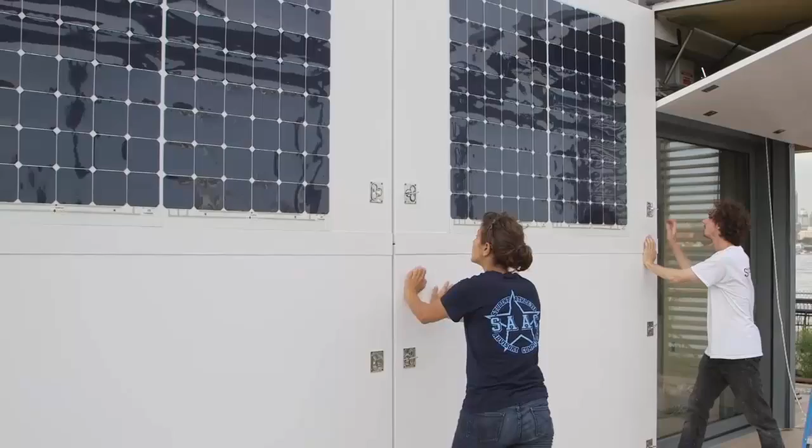But at the same time, sustainability is not always about the environment. It also relates to business. They will take a sustainable business strategies course and a project management course. Most of these courses are taught by industry people, those doing sustainability on a daily basis as part of their job.

Any organization that has a large number of employees and a physical infrastructure will have to have a sustainability office. If you have the passion to develop and maintain a sustainable world, come to us and we will help you shape your passion into a career which will create an impact.

So thank you again. Just by way of background, I have a degree in civil engineering with a minor in engineering management. But again, to age myself, the degree I have is civil engineering, but it's actually what you would call environmental engineering today. It was before they actually had something called environmental engineering.

Then when I went to law school, I think this was way before sustainability as a term was in vogue. When I went to law school, it was actually, I think, the first book I read since high school, because in my four years of engineering school, we didn't do a whole lot of reading back then. So it was a great way to think out of the other side of my brain for a while.

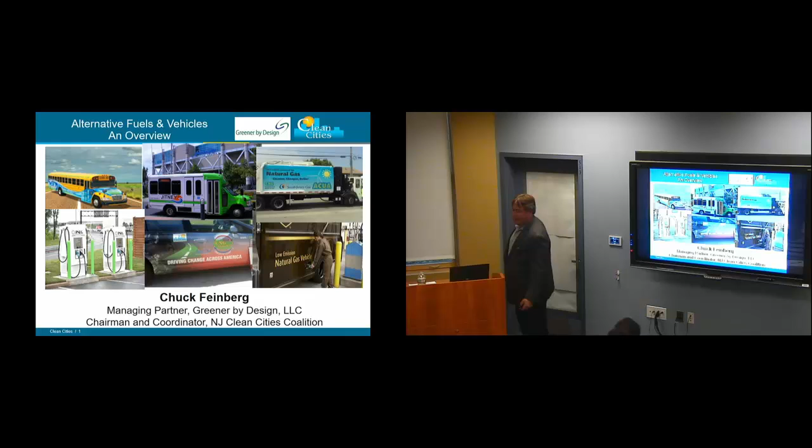But anyway, so I run an organization called the New Jersey Clean Cities Coalition. We're an independent nonprofit, and we have to go through a formal process to be designated as a Clean Cities Coalition by the U.S. Department of Energy.

So we're the only entity in the state that is exclusively focused on public-private partnerships to reduce petroleum in the transportation sector. And we'll talk about how we do that.

So it's all about building relationships and strengthening markets. We connect fleets to fuel providers. We connect technology vendors with service providers, infrastructure providers. We offer training and information doing things like this, specialized technical assistance.

When there are funding opportunities available through the Department of Energy or EPA or anyone else, that makes me a very popular person, because everybody thinks that I have some control over how those funds are doled out, and sometimes I have some influence, but I wouldn't say control.

We provide public recognition to fleets that are reducing their petroleum footprint and using alternative fuels. And we collect data and track progress as a government-funded organization—that comes with the territory.

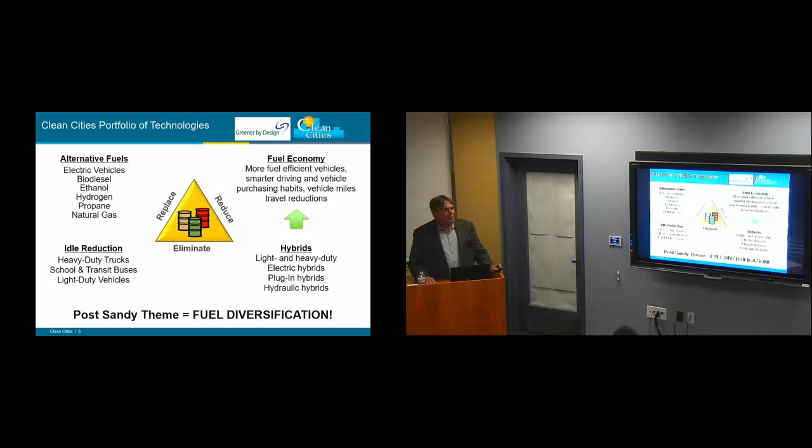If you think about it, there are lots of different ways we generate electricity—solar, petroleum, coal, wind, you name it. But when you look at transportation fuels, we're more than 90% reliant on petroleum. During and after Sandy, we saw issues with the fuel supply, and we've seen them recently with Harvey, Irma, and Maria. I'll talk more about that.

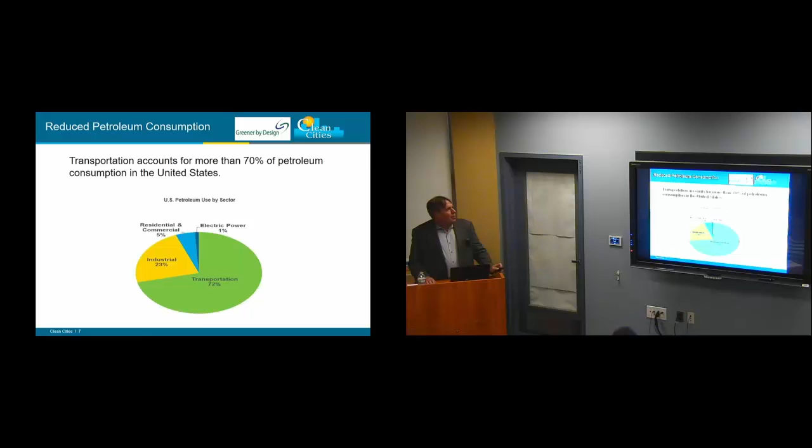Petroleum consumption: more than 70% of petroleum consumption in the United States is transportation related—big number. Greenhouse gases: about 27% of all greenhouse gas emissions in the United States relate to transportation. Imported petroleum is not as big an issue as it was when I first got involved back in 2009, 2010—those numbers have been steadily going down, but we did see a slight increase this past year. Still, about 25% is imported.

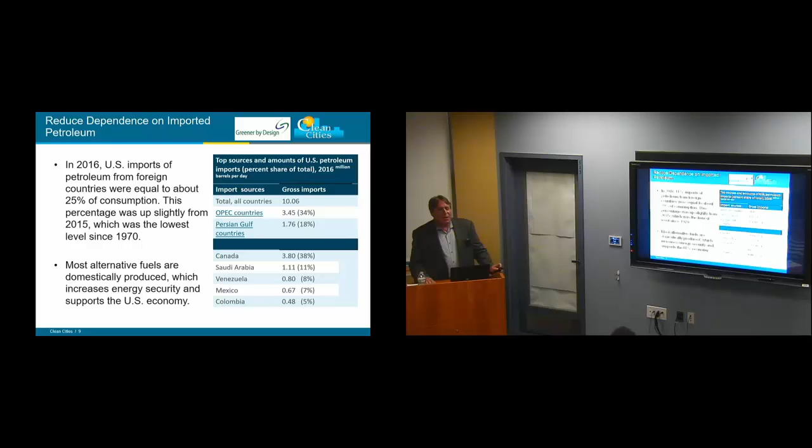The biggest importer is Canada, but there's also lots of imports from places that don't necessarily like the United States, subjecting us to fuel supply disruptions that would be big issues for us. It blows my mind that the United States actually exports petroleum, natural gas, LNG, but at the same time we're importing—there's obviously a very complicated story behind that, but something to think about.

Again, it's not just about alternative fuels, it's also about idle reduction, and that's really the low-hanging fruit of fuel economy. That's a mouthful.

Idle reduction activities include driver habits of not running their car unnecessarily, because there's the old way of thinking that it's more efficient for the engine to leave it on rather than turn it off and back on again. That is outdated—that is not the case anymore. Do not let anybody tell you that it is. Idle reduction is also very important for heavy duty fleets.

We work on installing truck stop electrification, which is a lot more than it used to be. In the old days, it was basically just plugging in the truck. But now, many truckers that overnight or whatever, when they have to take their breaks, in order for the climate control systems in the cab to continue running, they have to keep the engine on. In order for any refrigeration in the truck to continue operating, they have to keep the engine on. There's lots of new technologies out there now to separate those systems so that they don't have to keep the engine on, and they can run off of electricity or whatever.

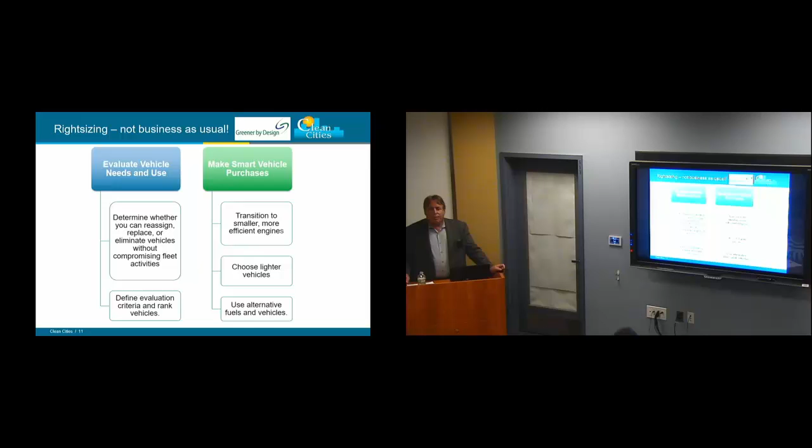We need to determine whether you can reassign, replace, or eliminate vehicles without compromising performance, and look at those vehicles and have a replacement schedule, have a maintenance schedule. Look to transition to smaller and lighter vehicles where possible, and in most cases it almost always is possible. And then look at alternative fuels, such as what we'll talk about.

But here's a couple of my favorite quotes that I've come across over the years in this. If I had asked people what they wanted, they would have said faster horses. That's a famous Henry Ford quote that comes up a lot now with electric vehicles when people ask, why is it taking so long for electric vehicles? Well, change takes time.

We can't solve problems by using the same kind of thinking we used when we created them. That's another one of my favorites. And this one's my absolute favorite: the Stone Age did not end because we ran out of stones, and the oil age will end long before we run out of oil. So just keep all of those in mind, and these are pretty much why I do what I'm doing.

So speaking of what I'm doing, here's a couple of the projects that I've been working on over the last couple of years. Whenever you're talking about alternative fuels and alternative fuel vehicles, it's always the chicken and egg situation. What comes first, the vehicle or the fueling infrastructure? I've heard the chicken and egg situation described recently as really more like a hot dog and a bun. You can't have one without the other. You need to have them both at the same time.

So a couple of these projects, I'll talk a little bit about the CNG fleet and infrastructure program, but just to highlight the EV policy support, this is a contract where I was hired by the New Jersey Department of Environmental Protection to help them, help bring electric vehicles to their attention. This is way back in 2011 when I put this report together. And one of the people from the state just the other day was referring to this report, and he said it's good news and it's bad news.

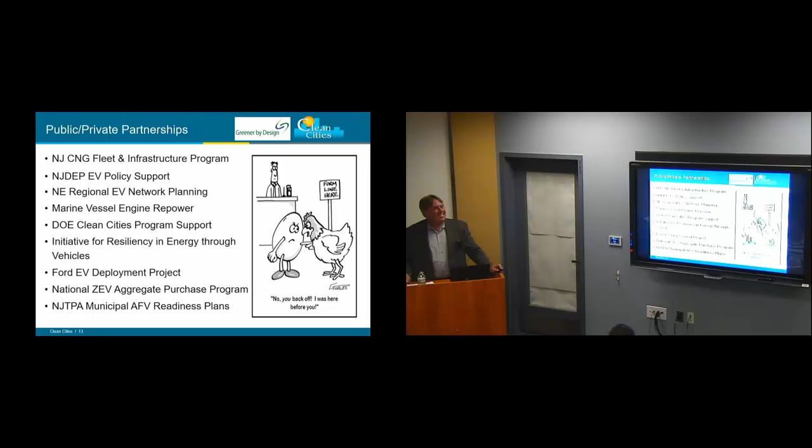If you remember, there was a major fuel disruption. Fully 11 days after the storm, more than 20% of the stations across the state of New Jersey did not have fuel. That was for two reasons. One, because of the power outages, they couldn't get the fuel out of the ground, out of the tanks. That was for some of them. And some of them totally ran out. The ones that did have power ran out of fuel and couldn't get more. We actually had gasoline rationing for more than a few days.

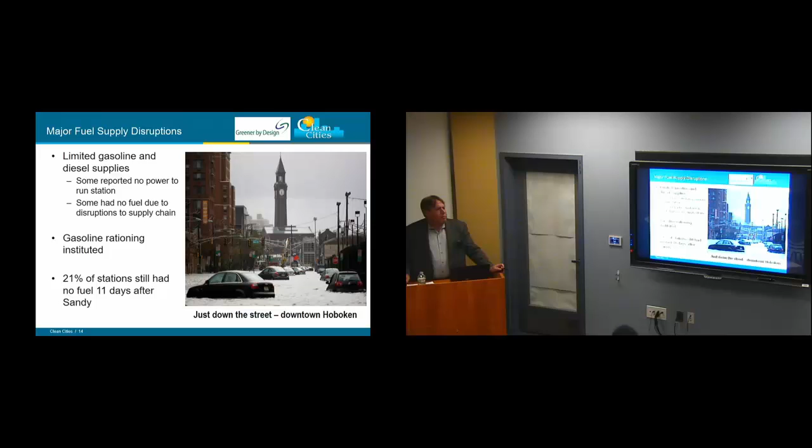So, among other things, that showed us the importance of fuel diversification. There are several examples of fleets that used alternative fuels, propane, compressed natural gas, even electric, that were able to continue operating during the emergency. And I pointed up the need for not so much first responders, but emergency planners to become more cognizant of the resources available to them. What fleets out there use alternative fuels? How can they be used in an emergency if needed? Maybe the first responder fleets themselves should incorporate alternative fuel vehicles.

Things like, there was an example of a propane-powered fleet up in Sparta, New Jersey, in Sussex County. You wouldn't think that Sussex County was affected by the hurricane, but they had lots of trees down, and because of that, they had power disruptions. So the local propane company, which runs their entire fleet on propane, was able to continue operating, and they were delivering propane to people's generators so they could continue operating. But because the emergency responders couldn't get out, it was the propane fleet drivers who got out of their trucks and removed the tree limbs with their chainsaws. So they were the ones responding to it.

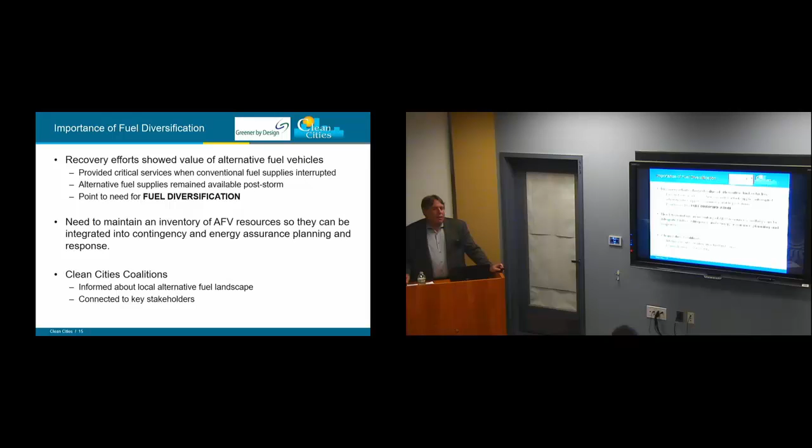It's also the Atlantic City Jitney Association, which I showed you one of the vehicles before. They took care of all the evacuations from the island of Atlantic City, where other traditionally fueled vehicles were not able to operate.

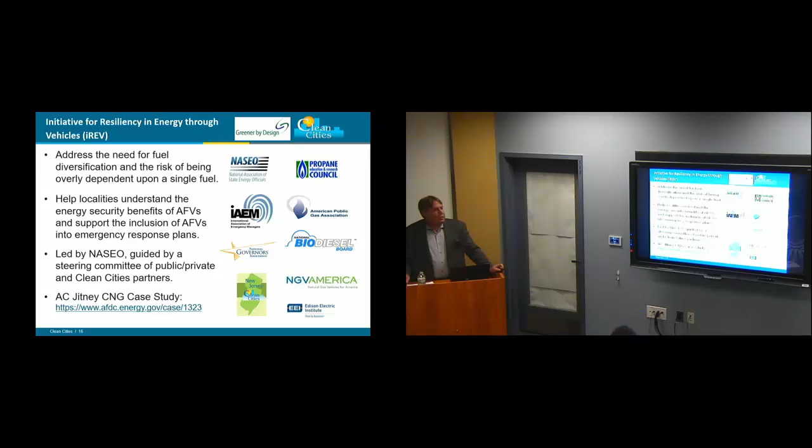And that led to a Department of Energy funded grant program that I'm working on that addresses the need for fuel diversification, working with localities and emergency responders and planners to help them become more aware of the resources already out there and what they should be looking at in the future. Another example is out in Long Island. There was a dump truck fleet that ran on compressed natural gas, and they were able to clear the roads on Long Island of all the sand, only because they operated on CNG.

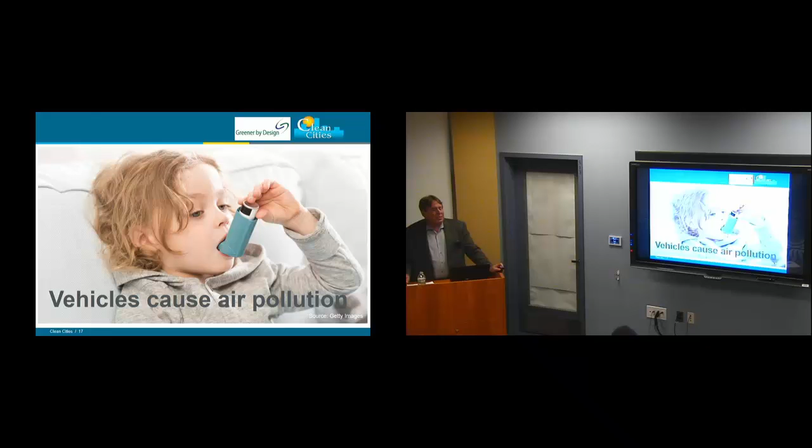So, bottom line is vehicles cause pollution. There's no two ways about it. About 50% of Americans live in areas where the air is unhealthy to breathe. Pretty scary number.

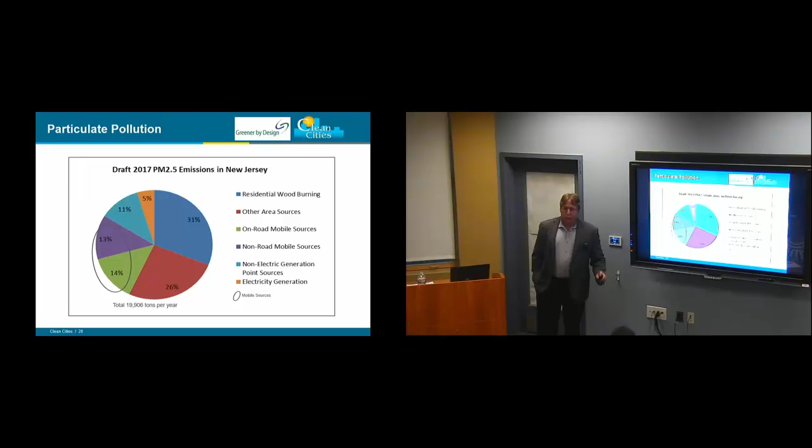Ozone, another big pollutant from vehicles. Ozone's a complicated concept. There's actually good ozone and bad ozone. The good ozone is up in the protective layer of the atmosphere in the stratosphere. That is being degraded by other factors, not necessarily related to transportation. You've probably heard about ozone holes in the atmosphere - that's good ozone, we like that ozone. Bad ozone is commonly known as smog, caused by the emissions of nitrogen oxides that come from vehicles. That's ground level ozone. About 70% of NOx emissions in New Jersey are from transportation.

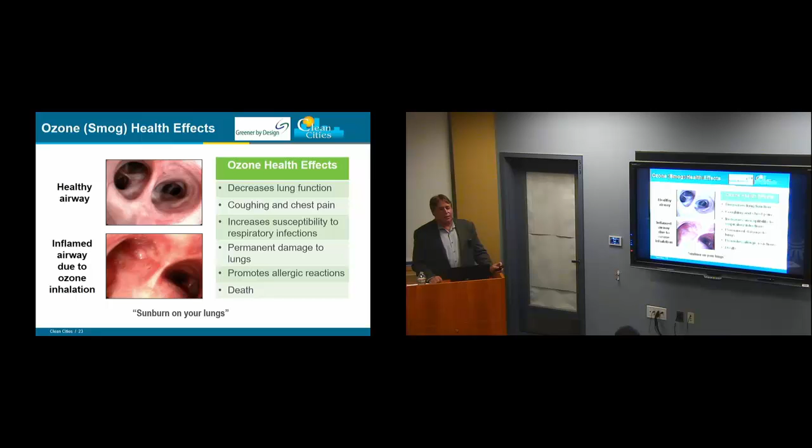So the ground level ozone is formed when the nitrogen oxides react with other volatile organics and they form smog. This is what happens with too much ozone in the air - sorry to be graphic, but the top picture there is a healthy airway, those are your lungs, you can see it's a clear path. The lower picture is a lung that's been inflamed due to ozone pollution. I've heard friends of mine at the DEP refer to ozone pollution as sunburn on your lungs. Not a pretty picture.

And greenhouse gas emissions - I mentioned this earlier, 46% of New Jersey's greenhouse gas emissions are related to transportation.

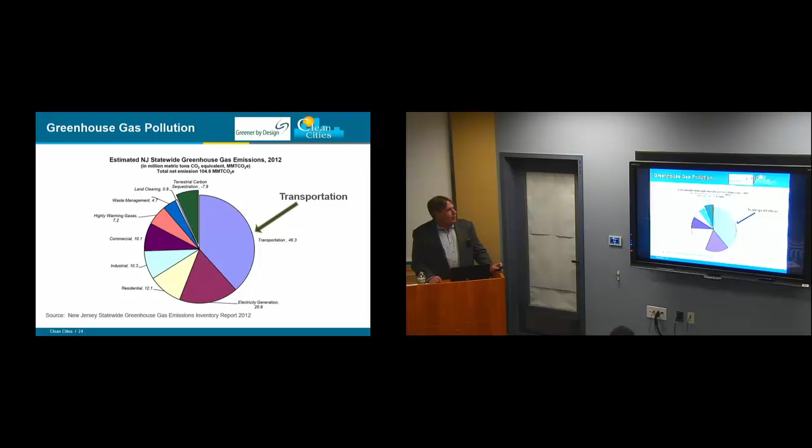But so think about it. Isn't there regulations that govern this? Why is this still such an issue?

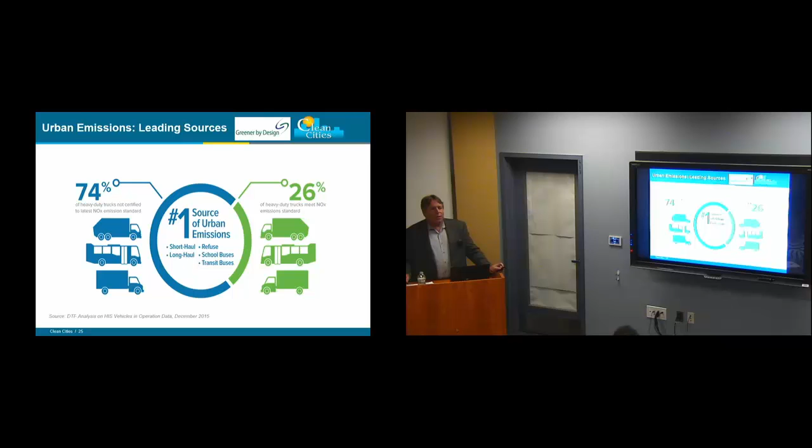Well, the number one source of urban emissions is transportation - heavy duty, short haul, long haul, school buses, refuse trucks, delivery trucks, all of the above. And 74% of those trucks on the road now do not meet emission standards because they don't have to. The emission standards only apply to new vehicles, so it takes a very long time to get those old vehicles off the road under current scenarios.

Which brings me to want to talk about alternative fuels. As I said with the fleet scenario, it's no longer one size fits all. Some of these fuels work differently in different situations. Right now, electric vehicles are primarily for the light-duty consumer passenger vehicle market. Biodiesel, propane, natural gas - those are better suited for medium and heavy-duty vehicles. Those lines are changing as electric technologies continue to advance.

That's going to change over time. I've been hearing stories of electric trash trucks being deployed in a couple towns in California. Tesla's working on an electric heavy-duty vehicle. Some of the other manufacturers are also, but it's going to be many years before they are commercially available at a reasonable price.

Are the buses in New York hybrids or electric? Many buses in New York are hybrid. They don't have any fully electric buses yet, and they also have a lot of CNG buses in New York. New Jersey Transit has, I think, 150 or so compressed natural gas buses, the full-size transit buses.

And they just did receive a federal grant to help them offset the cost of their first electric bus. So New Jersey is getting one electric bus. Right now it's probably 3 times more expensive than a regular bus, and since New Jersey Transit is broke, I hate to say it, but it doesn't make sense for them to spend that extra money. But eventually we'll get there.

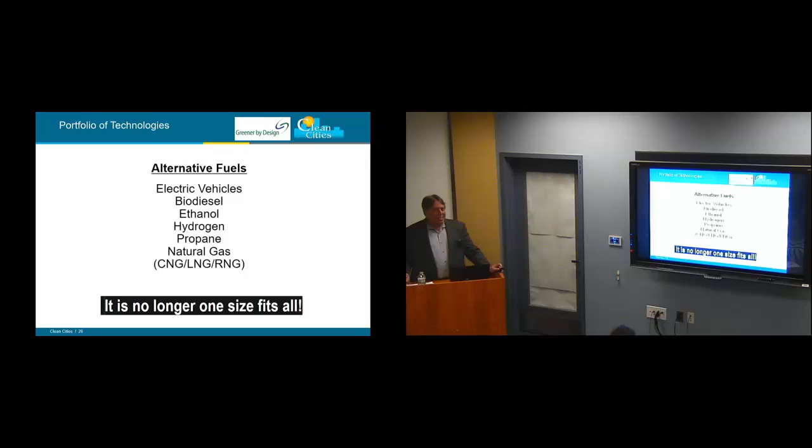So let me talk about natural gas. First of all, natural gas is a fossil fuel, and it's readily available now thanks to fracking. So there are some issues with natural gas, but I always bring it back to compared to what. Sure, we want a perfect clean fuel that's clean well-to-wheels, but compared to imported diesel fuel, natural gas is much cleaner.

And it's also the cleanest burning fuel available for heavy-duty vehicles. Look at the chemical formulas on the second line there - natural gas is CH4, so 1 carbon, compared to diesel, which is 14 carbon molecules. So it's an inherently cleaner burning fuel. And replacing one diesel garbage truck with a natural gas garbage truck gives the same emission benefits as taking 325 cars off the road. Pretty significant.

And even more for noise reduction, and garbage trucks are obviously operating in communities and neighborhoods. Noise reduction is significant - a natural gas garbage truck is 90% quieter than a diesel counterpart. And when we first started deploying these, people actually complained because people will complain about anything given the opportunity, but they complained that they didn't hear the truck coming from 2 blocks away, and they didn't get their cans out in time.

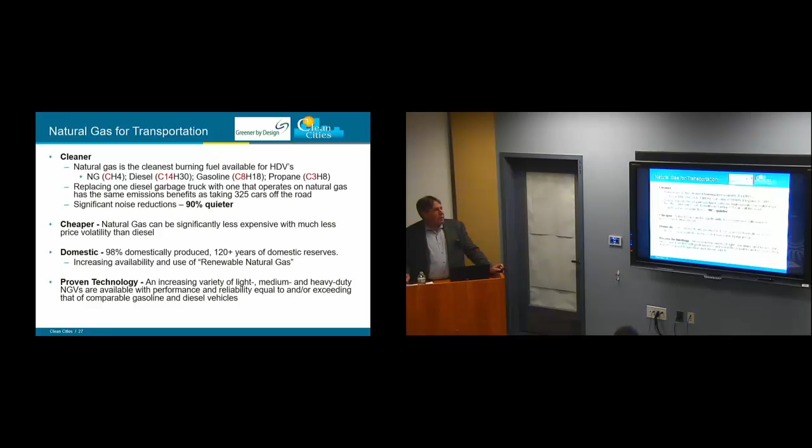And now, I'll talk more about this, but increasingly available is renewable natural gas. This is gas that's produced from anaerobic digestion, from sewage treatment plants, or food waste recovery, or anything along those lines. It's biogas that's cleaned up to be chemically equivalent to natural gas.

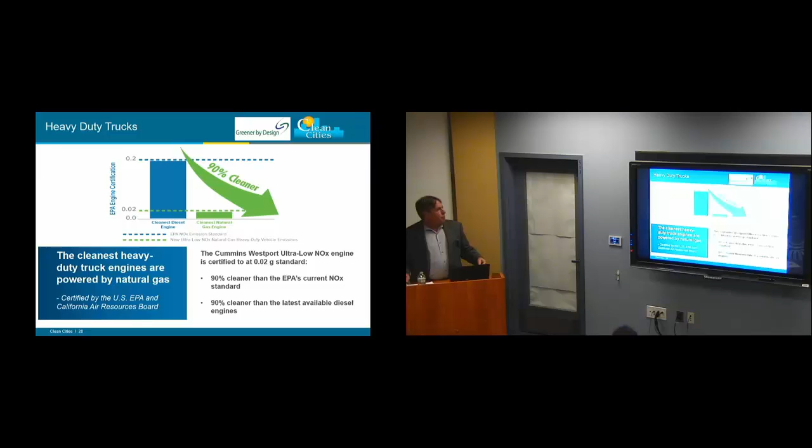And just to emphasize the point, the top line there, the 0.2, that's the current EPA standard for heavy-duty trucks. I actually don't remember what 0.2 what, but I think it's NOx emissions. A compressed natural gas engine, which has recently been certified by California and EPA as the cleanest heavy-duty truck available, is 90% cleaner than the EPA standard. The cleanest diesel engine meets that EPA standard, but the natural gas engine is 0.02 versus 0.2. So pretty significant emissions benefits, and this is on a well-to-wheels basis - this includes production of the natural gas versus production of the diesel.

So again, fueling with natural gas reduces CO2 greenhouse gas emissions. With liquefied natural gas, it's an 11% reduction. With compressed natural gas, it's a 17% reduction. Pretty significant numbers, on a well-to-wheels basis.

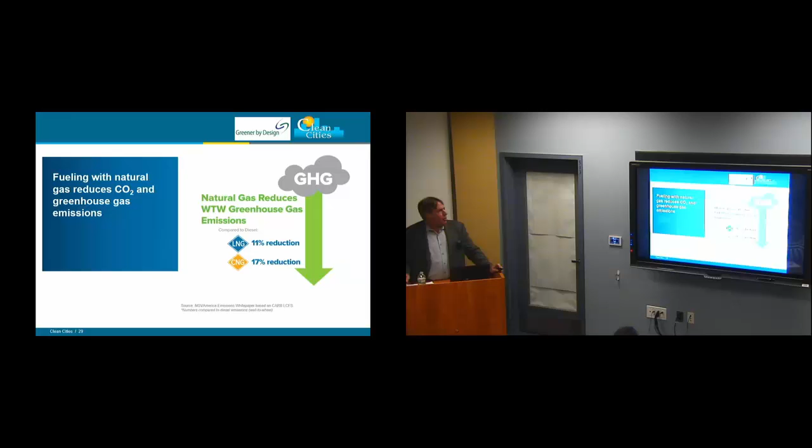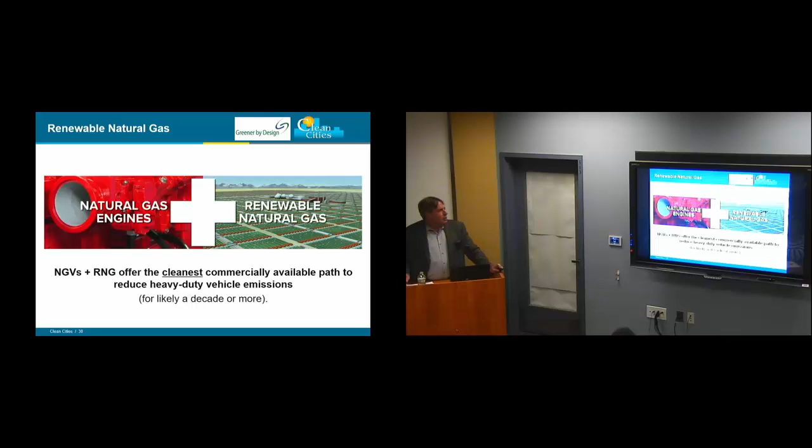And when you combine the latest natural gas engines with renewable natural gas, it's significantly cleaner. And as I mentioned, it likely will remain so for the next decade or so, until new technologies come along and become commercially available.

But if you look at the carbon intensity rating, conventional diesel fuel is 102, but using renewable natural gas generated from food waste, it's actually negative carbon intensity. So on a life cycle basis, it's extremely beneficial from a carbon intensity standpoint.

And something for those of you looking for jobs coming up soon - I'm involved in a big development project that hasn't been announced yet. It's a food waste collection facility that's going to be developing anaerobic digestion and generating biogas. It's going to be based in Newark, and it's the first of what we hope will be many of these across the world. From that process, we will be collecting the food waste, putting it through the digestion process, and that generates the renewable natural gas, and it also generates organic fertilizer. So a pretty cool project.

Quick question: how scalable is it? Basically at the aggregate level, what's the energy content of all waste? And also, given that we are trying to minimize waste, is it just a lab thing?

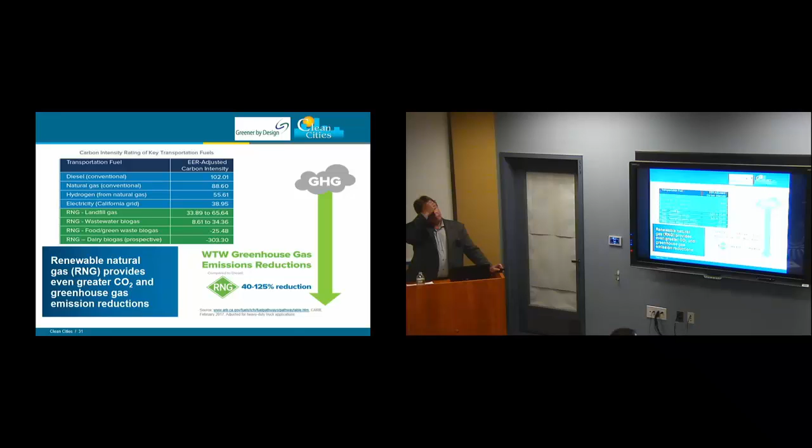Yeah, if I can add to it - many organizations have started this on a much smaller scale. Even Stevens has its own anaerobic digester. Again, the idea is to connect it to the cogen plant. So what they are doing, on a much larger scale, is taking stuff directly from the local community. Hopefully that would be a very successful venture.

Sure, I'm just trying to see the maximum share in the portfolio of all solutions. A whole-city approach, to my knowledge, hasn't been done yet. But it's scaled up from an individual farm or a lab on a campus, taking your dining hall waste, to whatever.

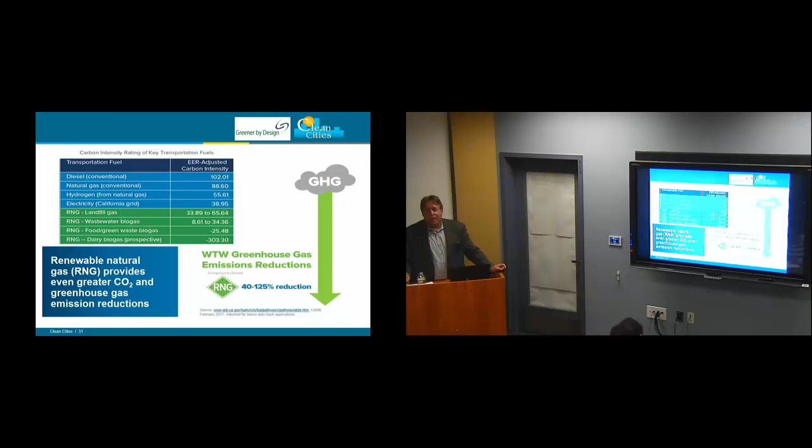So just an example of putting all of this to use - this was a project we had. This was actually a $15 million grant that we were awarded from the Department of Energy. And we used that to leverage about $36 million of non-federal money, and again, that money probably would not have been spent in New Jersey otherwise.

But we worked with 15 fleets, public and private, across the state, and transitioned them. We got rid of their diesel trucks and got CNG trucks for them. We put in 6 fueling stations across the state. And just this project alone displaces more than 2 million gallons of petroleum a year and 900,000 pounds of criteria pollutants.

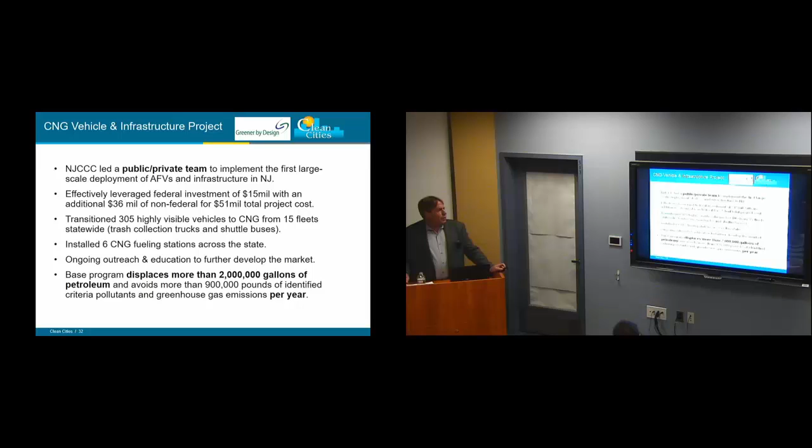So a very successful project, and every one of the fleets that was involved in this project, with the help of the federal money, has since increased the number of CNG vehicles that they have, which is a great sign. And other fleets in the area of those stations we put in are also converting their fleets.

So let's move on to electric vehicles. I talked about CNG in the context of heavy-duty trucks. Electric vehicles are something totally different right now.

This is an actual picture of Thomas Edison's home charging station from 1911-ish that is at the Edison Museum in West Orange. This thing looks like something out of a Frankenstein movie with dials and gadgets and all that. I was afraid to touch it. I don't know if it works or not. Wasn't about to go near it.

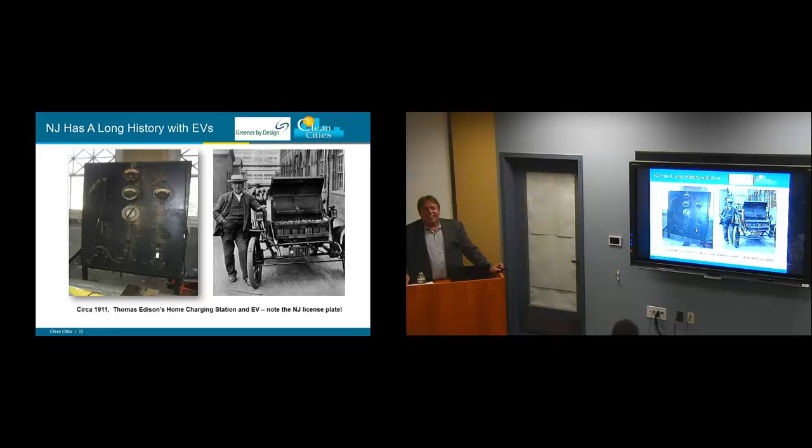And that's Thomas Edison's car, electric vehicle. I'm sure you can't see it, but the license plate is New Jersey registered. I don't know if this was the exact vehicle or not, but Henry Ford actually gave Mrs. Edison an electric vehicle because he felt gasoline, or the kerosene they were using at the time, was too dirty a fuel for women. So he gave her an electric vehicle.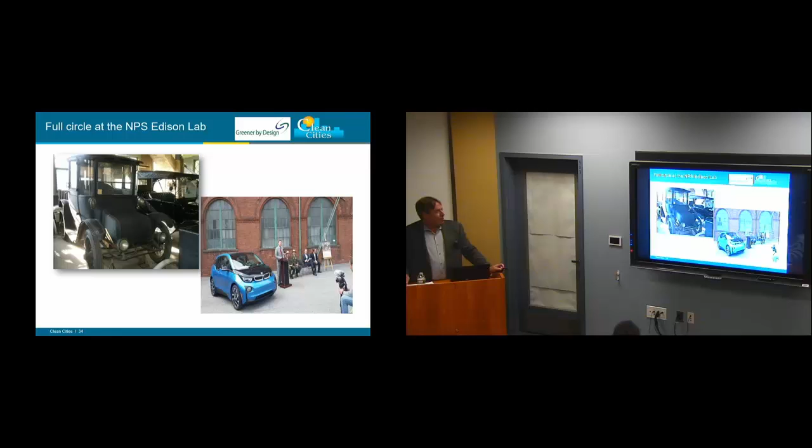This is the Edison Lab, National Park Service Edison Lab. A couple of weeks ago, we had an event there at the same site where there's pictures of this electric vehicle from the early 1900s. We had a BMW i3 there, and BMW just donated a couple charging stations to the National Park Service to have at their parks and historical sites. Pretty cool ceremony.

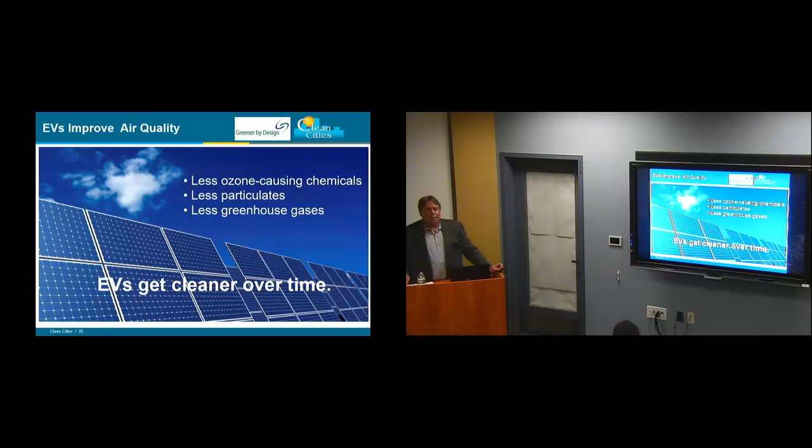So the thing with electric vehicles is they will continue to get cleaner over time. As the grid itself cleans up, electric vehicles will get cleaner. Here in New Jersey, we have one of the cleanest mixes of generation assets in the country. So whenever I talk about electric vehicles, I always get, aren't you just replacing the emissions from the tailpipe with smokestack emissions from generating facilities? Well, not in New Jersey. And in fact, not anywhere in the country these days.

For a while, some of the Midwest states that relied on coal, it was close whether electric vehicles were actually cleaner or not. But now that coal is being phased out and hopefully will remain phased out, our electric generation is very clean.

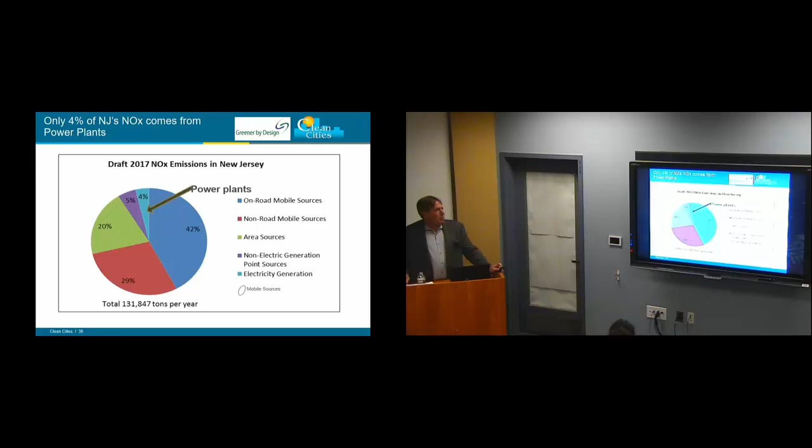So when you talk about electric vehicles, there's basically four technologies out there. Just start throwing stuff at me if this is basic information or if you guys already know this. So there's plug-in hybrids, there's fully battery electric, 100% battery electric vehicles, and there's battery electric with range extenders. Some of those work in different ways. Some generate electricity to recharge the battery while it's in motion, and those are gasoline. Or some are true hybrids that run on electric or run on gasoline.

And then there's hydrogen fuel cells, which is an up-and-coming technology. I'll talk a little bit more about that. All of the major automakers are coming out with, or are out with, hydrogen fuel cell vehicles right now.

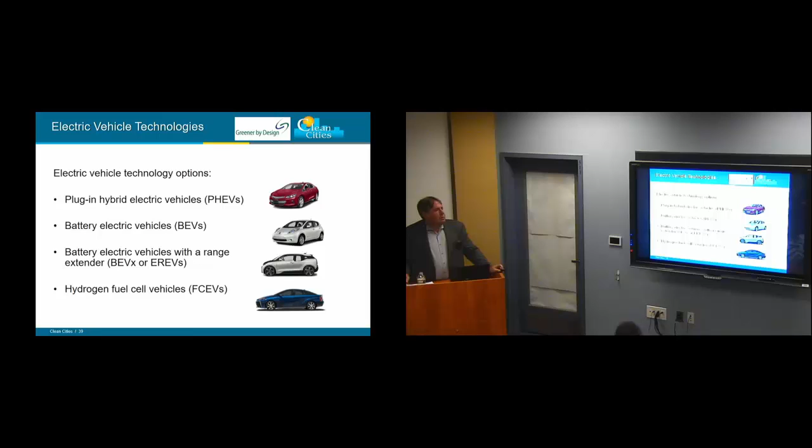So benefits of electric vehicles: fuel cost savings, obviously. Savings on maintenance. There's so many fewer moving parts on an electric vehicle that the maintenance is extremely simple. I mentioned tailpipe emissions from electric vehicles. Well, guess what? There's no tailpipe on electric vehicles, so obviously there's no emissions.

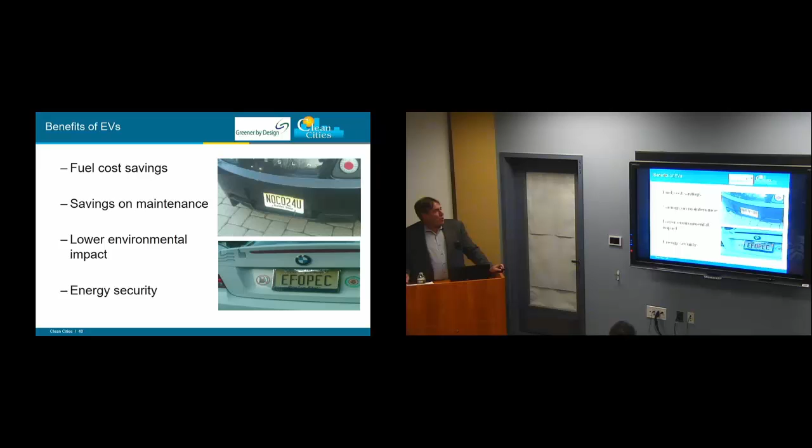Lower environmental impact and energy security. This is a pretty basic slide, but what I like is the pictures of these actual license plates in New Jersey. One says No CO2 for you, and one says F OPEC, which is one of my favorites.

So why has it taken so long? It's all about the batteries. The power density, the cost, the weight, the battery life—you can see on that graph, on both of those graphs, the costs have gone down tremendously over the past couple of years. The leaps in technology have been fascinating to watch, and they're still going on. And the battery weight, the weight of the vehicle obviously has a lot to do with the range and with the impact of the vehicle.

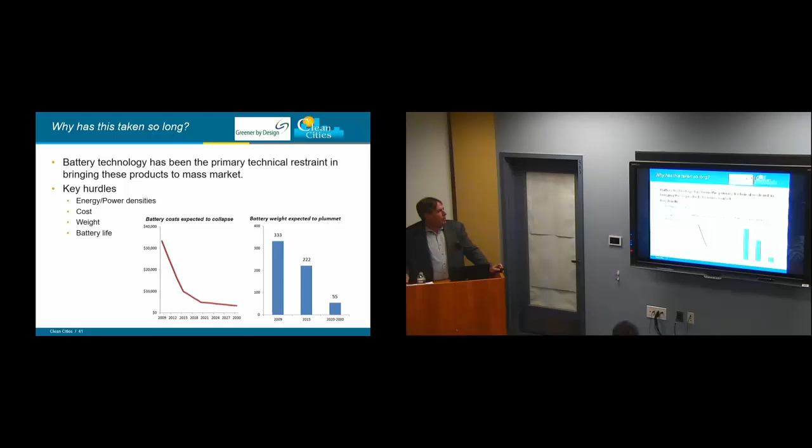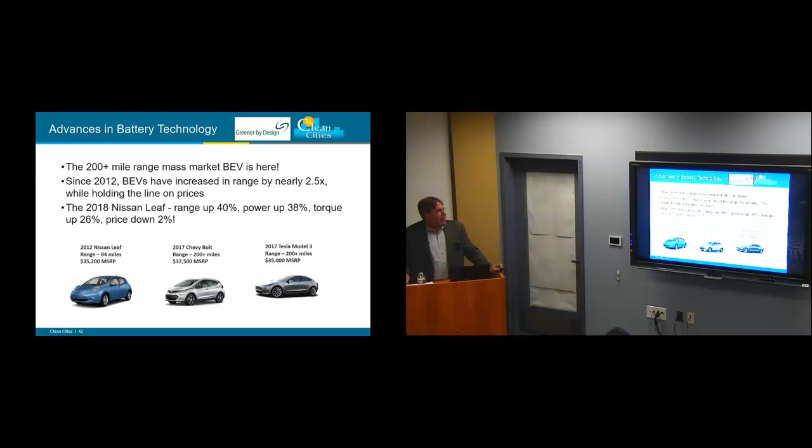So 200-mile-plus electric vehicles are on the road now. That is the new standard. Not to say that all electric vehicles out there can hit that, but that's the new standard. And since 2012, the range of electric vehicles has increased by 2.5 times, and they're selling for about the same price. In fact, the new Leaf has a 40% increase in range, and it costs less than the previous model.

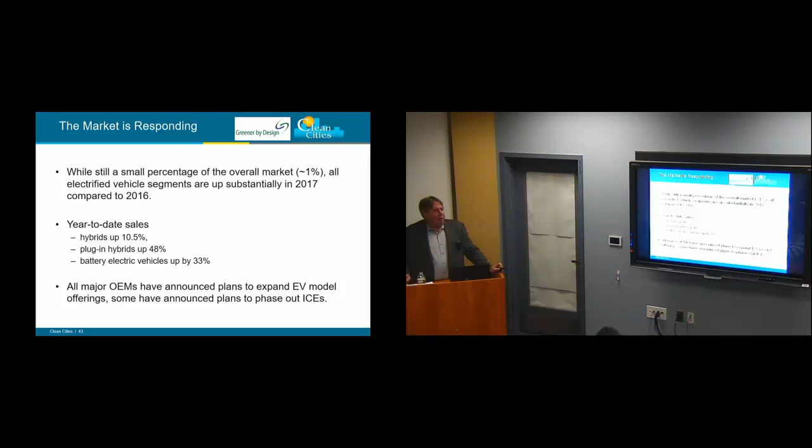Sales are responding, the market is responding, and all of the major car companies have announced plans to increase the models available, and some have even announced they will be phasing out internal combustion engines. Volvo, for example, recently announced that by a certain year they're planning to go fully electric.

It wasn't long ago that I actually knew every electric vehicle driver in the state of New Jersey personally, which is a pretty funny thing to say, but now there's almost 13,000 of them. That was as of July, and that number's gone up significantly since. So it's a pretty steep curve to the positive.

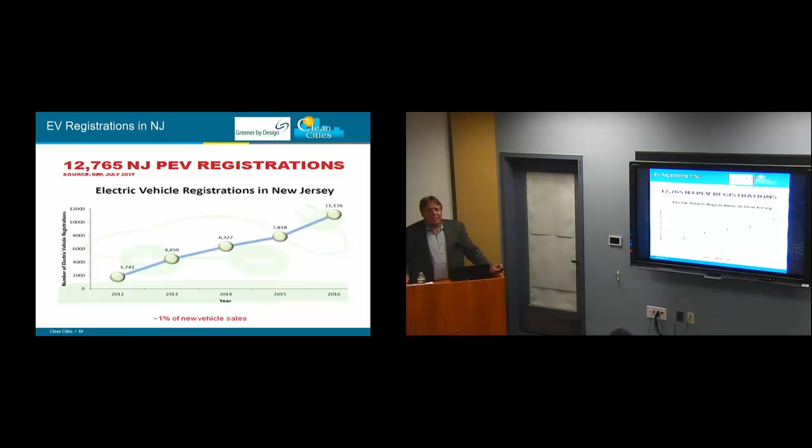So, charging hierarchy. When you're charging electric vehicles, there's some terminology you need to be familiar with. The bulk of the charging, most of the time, will be done by people at home. But not everybody can do that, as we saw in Secaucus and elsewhere. With multifamily housing, unless you have a private house with a driveway, you're not going to be able to charge at home. Those are challenges that have to be overcome.

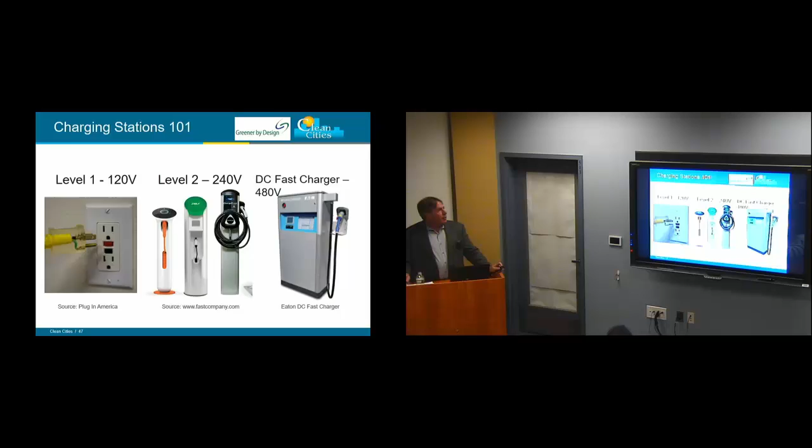There are three different levels of charging. Level 1 is obviously just a regular wall outlet. Level 2 is more like a 3-pronged dryer outlet, and then there's DC fast charging. The time it takes to charge using these different options varies greatly.

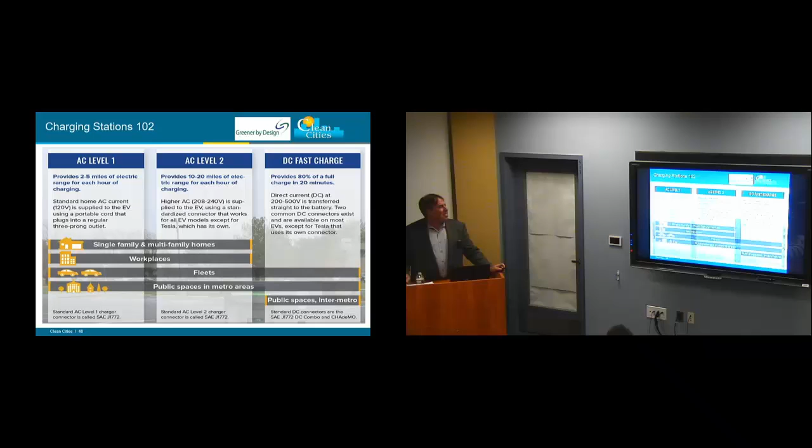Interesting thing I just heard yesterday about Amazon—one of the issues with electric vehicles is what if you run out of power on the road and don't have an opportunity to charge? Amazon just got a patent for a drone charging station. They're developing this now, but they will deploy a drone to you if you have an emergency service with them, and that drone will charge your vehicle on the road. Very cool—what are they going to think of next? That's the emergency road service of the future.

These are PSE&G DC fast chargers that just went up at the rest stops along the New Jersey Turnpike. You can see the charging stations across the state—the publicly accessible charging stations are pretty well dispersed, so you can usually find one.

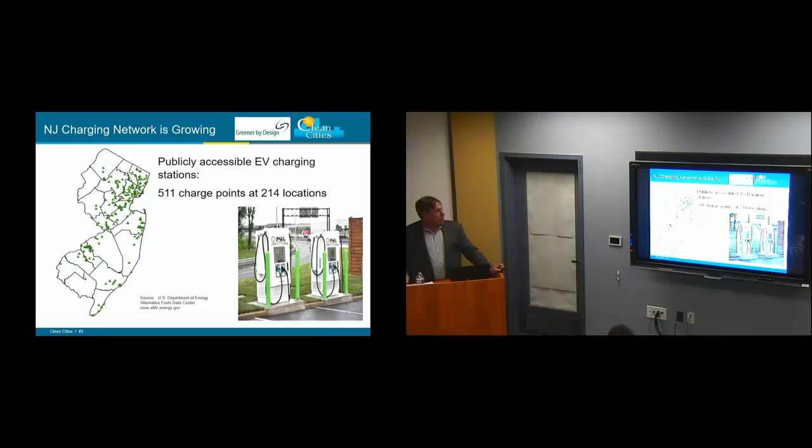There are a number of incentives in the state of New Jersey that we don't need to go into right now. One thing that always gets me is high occupancy lane access, which has been hugely successful in California in getting people to use electric vehicles. You could do that in New Jersey too, but I defy anybody in this room to tell me where there is a high occupancy lane in New Jersey.

So the regulations say that if you have one? Isn't there one on the turnpike? I come from South Jersey every now and then, I drive between exit 11 and 14, I'm pretty sure there is. I don't think so. I think there's one for a short stretch near the George Washington Bridge, that's the one I'm familiar with. But I don't think there's any along the bulk of the turnpike. When you say high occupancy vehicle, you mean basically the carpool lane, correct? Yeah, I'm almost certain there is a lane on the turnpike. Okay.

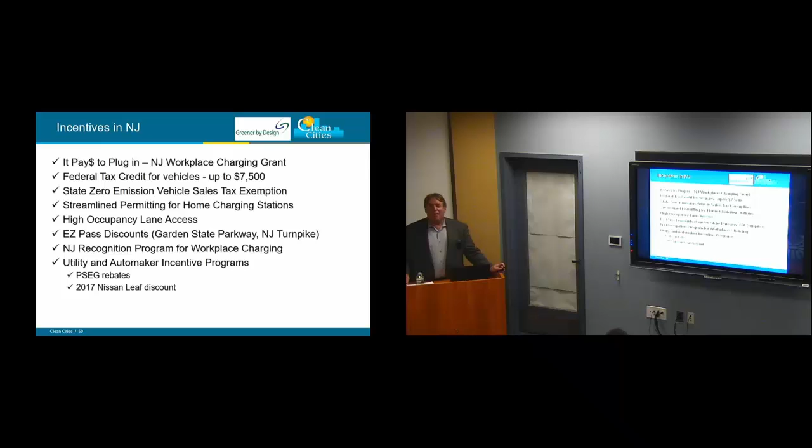In any case, it's not enough to modify anybody's behavior like it has been in California.

So just a couple other points real quick. Vehicle electrification isn't just about the drive systems. Start-stop technology is something that's catching on now. The Toyota Prius, the original Prius, was the first time I had seen this, where you go to a red light, stop, and the engine shuts off. You're like, what happened to my car? But then you step on the gas and it starts up again. This is new technology, being deployed now in the heavy-duty truck market, which is huge. Just about every new vehicle is going to have that.

And then there's the whole thing with connected vehicles. You don't even think about how this has snuck into vehicle technology in new cars these days - all your smartphone apps, your navigation, parking assist, now getting into autonomous and semi-autonomous vehicles, and the wireless technologies coming soon: vehicle-to-vehicle communications, vehicle-to-infrastructure communications, and vehicle-to-grid. So during peak power time on a summer afternoon, maybe at some point in the future you could plug your vehicle in, and instead of getting a charge from the grid, you could put power back to the grid and get paid by the utility for that. That's coming, it's not quite here yet, but it's coming. Then you can charge up at an off-peak hour when you don't need it.

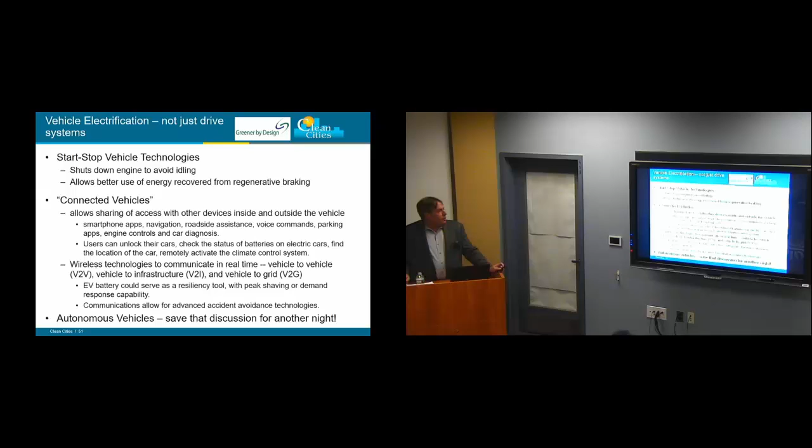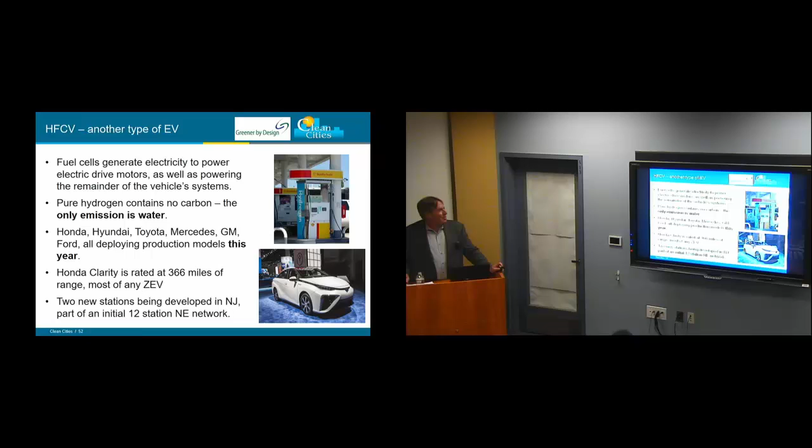So hydrogen fuel cells, real quick - the only emission from a hydrogen fuel cell vehicle is water. It needs a couple leaps in technology to make these commercially viable, but some automakers are really investing an awful lot of money into it. Right now there's no economically or environmentally sustainable way of mass producing the hydrogen. It's the most common element on Earth, but it's not found by itself - you have to separate it from something else.

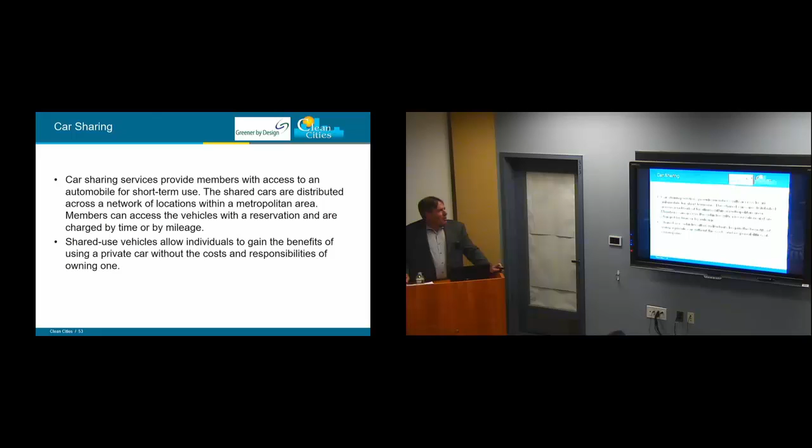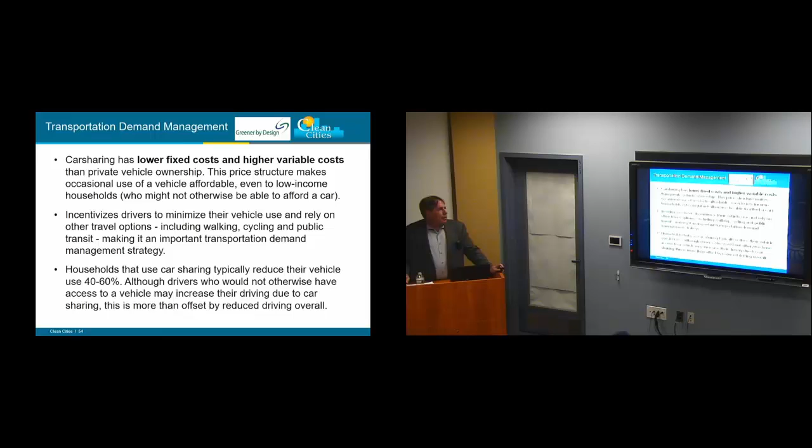Just real quick about car sharing. You guys are probably more familiar with Uber and Lyft than I am, but the thing about it is lower fixed costs and higher variable costs. So in addition to taking cars off the road by being available, it makes the driver think about what modes of transportation are available for this trip. Should I walk? Should I take public transit? Or should I call a shared car? So it's really an evolving transportation demand management strategy, and it's big business.

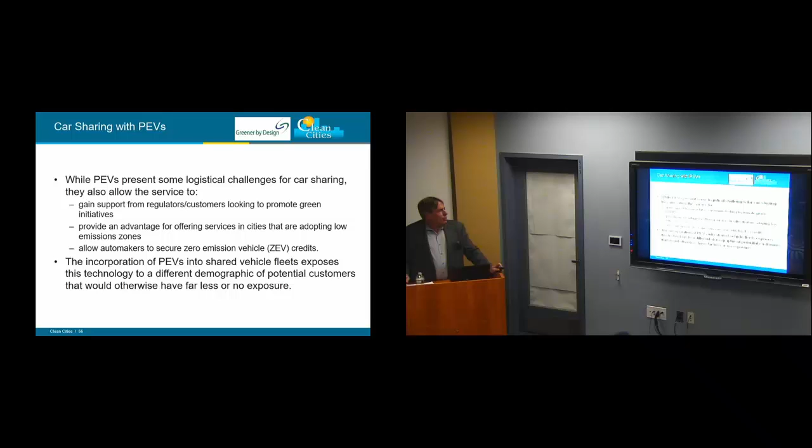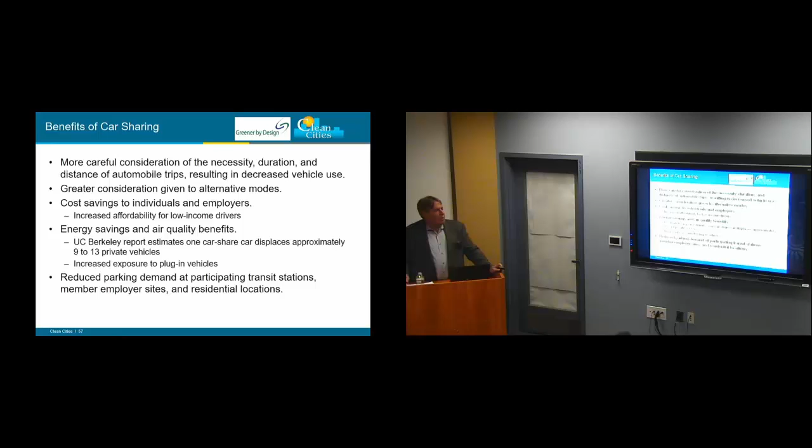There are definitely logistical challenges for introducing electric vehicles into car shares, but that's a great opportunity to get people familiar with electric vehicles and to get people who might not otherwise have used them to try them out. Car sharing allows people who might not otherwise be able to afford a car to actually be able to use one. There are lots of things about car sharing that you don't really think about, but reduced parking demand is also a huge factor.

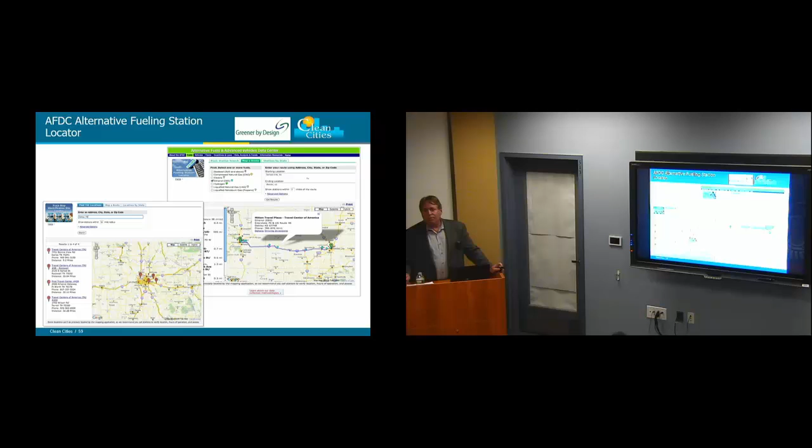So for more information - I think I crammed a lot into this hour - there's something called the Alternative Fuel Data Center, a Department of Energy website, AFDC. You can spend hours on this website following all the links; if you're interested in the subject, I encourage you to look at it. One of the other tools is the station locator, so you can find every alternative fuel station in any geography you're looking at. You can type in any fuel and sort it that way, plan your routes, or look at every electric vehicle charging station within 10 miles of Hoboken, for example. And that's it, time's up.